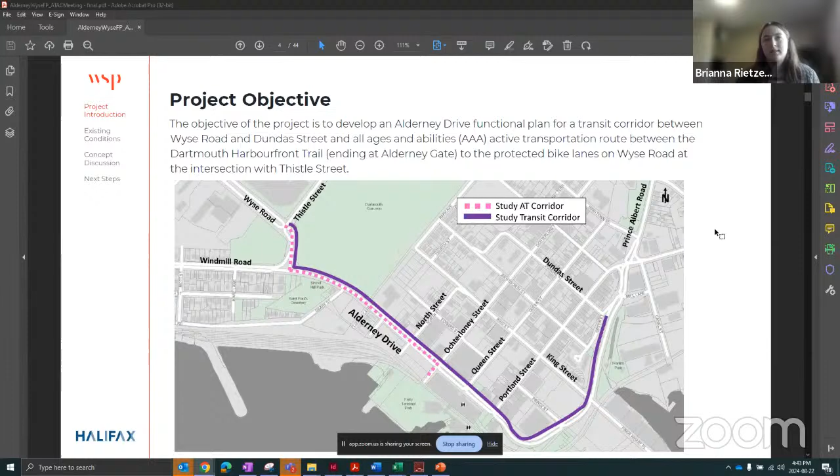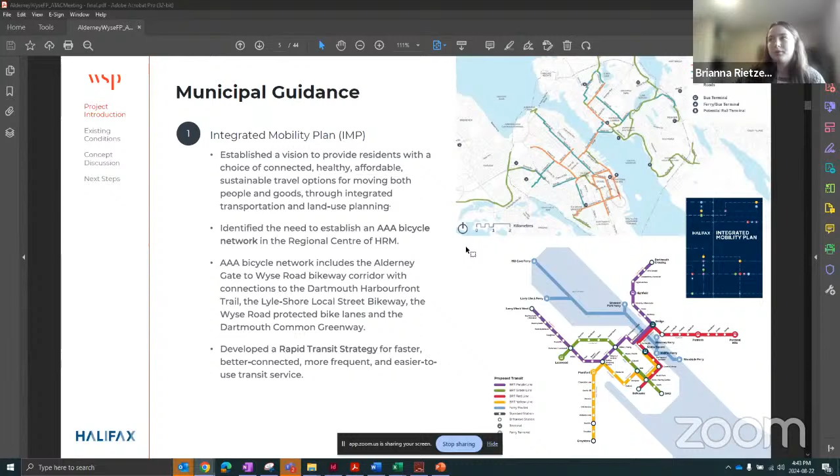We looked at the Integrated Mobility Plan, which identifies a cycling route and a bus rapid transit route through the corridor, and that's what informed this project. We also looked at the Active Transportation Priorities Plan, which made it a priority to double the number of trips made on foot and by bike by 2026. Hopefully this project can help facilitate that.

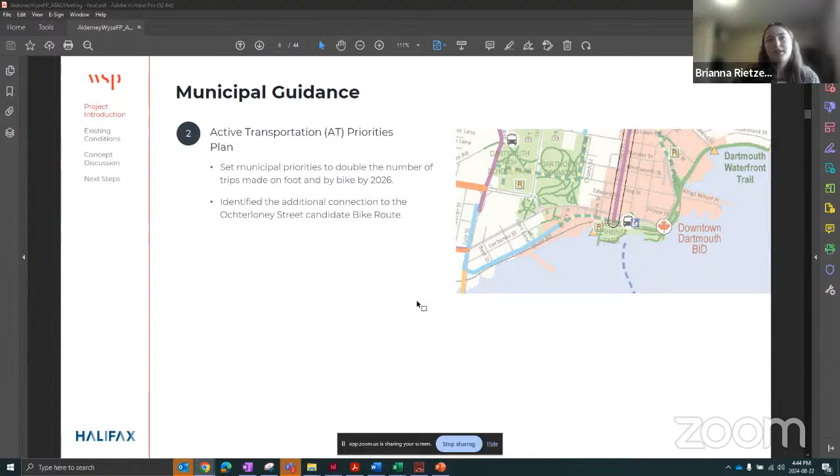So far in the project, we've established the existing conditions and come up with three conceptual designs for the study corridor, and we're in the process of public and stakeholder engagement. Then we'll evaluate the concepts and select a preferred one to take to functional design and report.

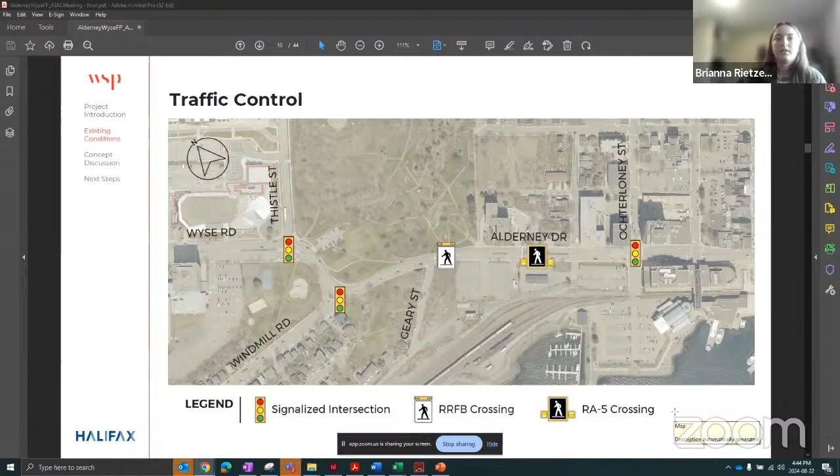So I've already gone through that. The existing traffic control in the area is a mix of signalized intersections, RRFB crossings, and RA5 crossings. The grade is pretty flat along the waterfront Alderney Drive area, but as it goes up the hill it gets pretty high, up to 8% grade in some sections.

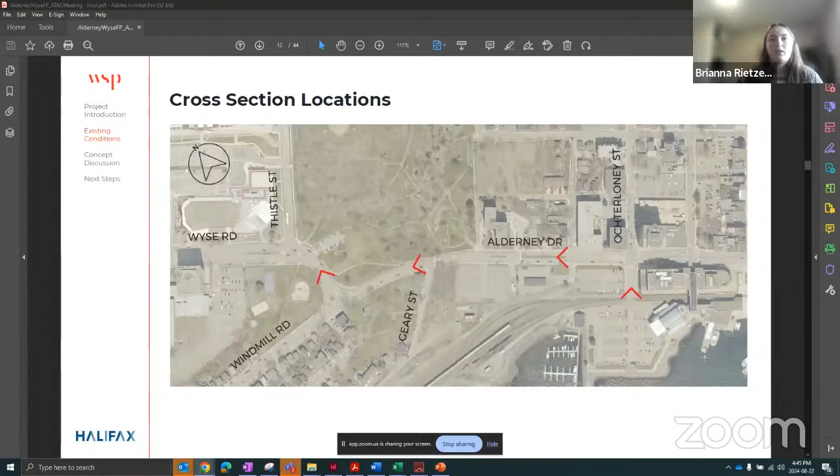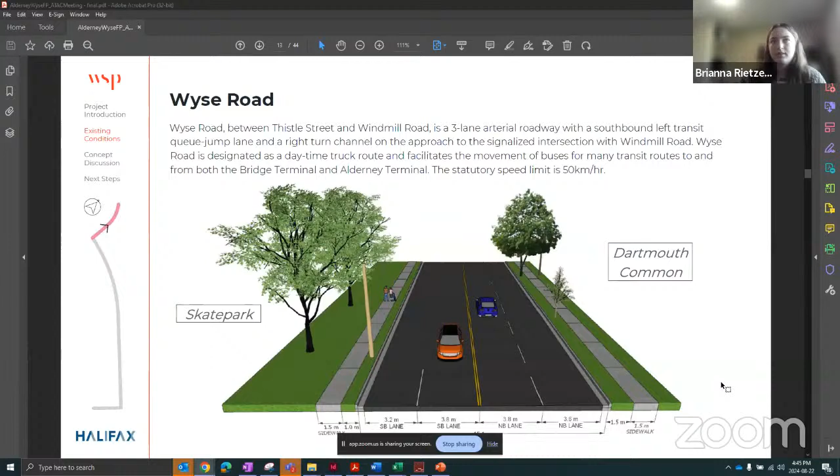The Wyse Road area is kind of a constrained area - there's a retaining wall on the right side and plenty of mature trees that we were hoping to avoid with this project. Same situation with Windmill Road, with a retaining wall on the Dartmouth Common side. This is our pinch point area - it was the thinnest road area, with plenty of mature trees in this section as well.

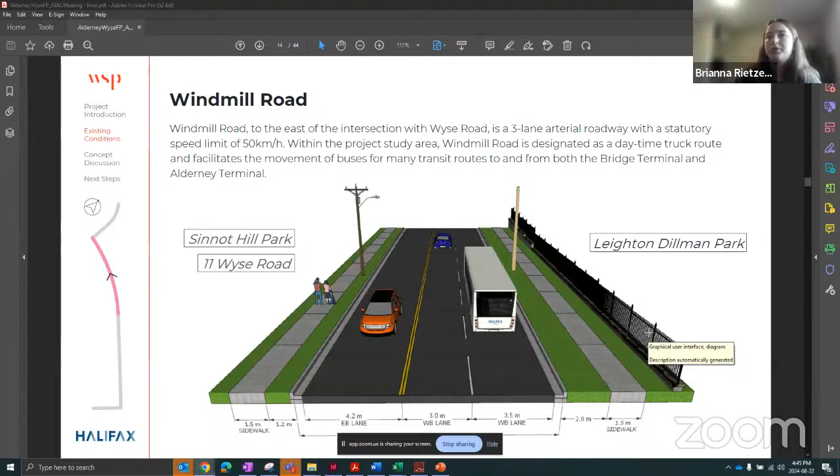Alderney Drive has mature trees as well, and some buildings pretty close to the frontage of the sidewalk, so that was something to consider. Ochterlony Street has a pretty wide cross section, but there's a CN rail crossing to think about, and a high volume of pedestrians through the area.

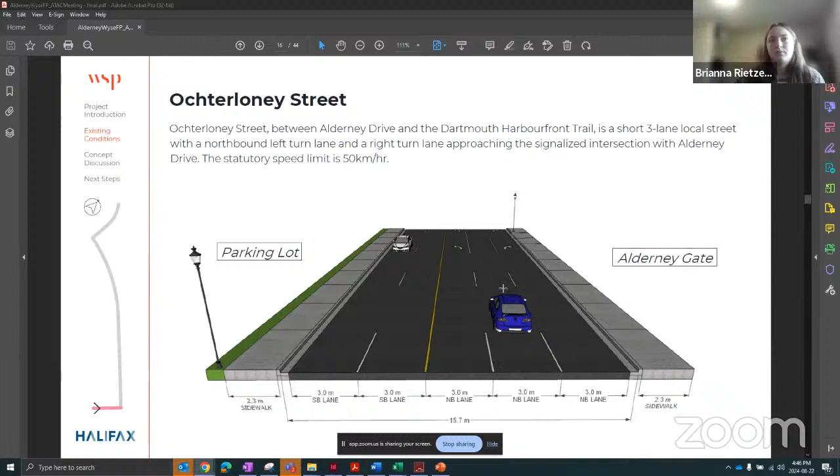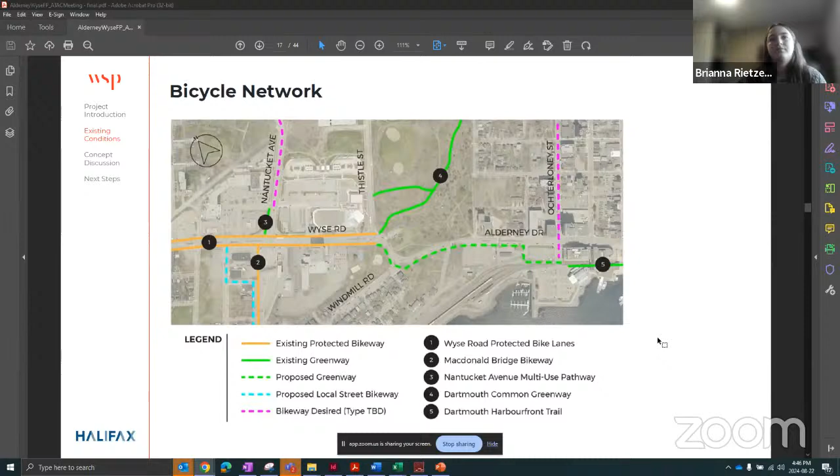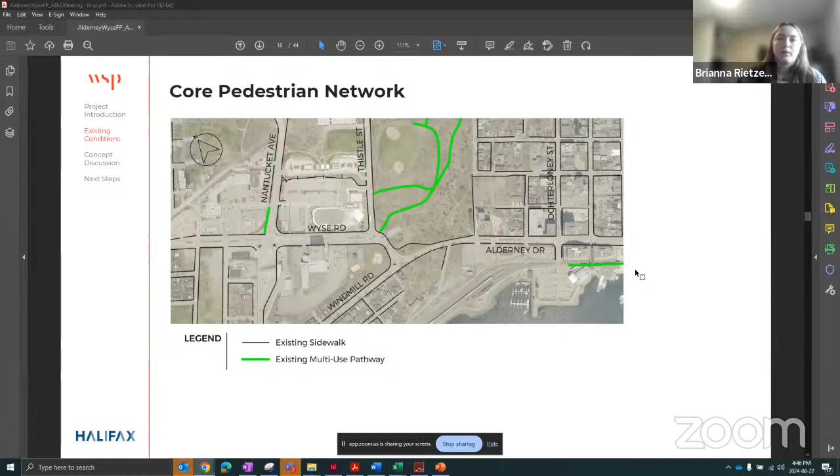Here's the existing and proposed cycling network. The dashed green proposed greenway section is what we're looking at for this project. In the core pedestrian network, the black is sidewalk, plenty of that available in the area, and the green is multi-use pathway. This multi-use pathway on the right side of the page is where we're trying to connect this project to the Dartmouth Harbourfront Trail.

We won't get into the volumes too much, but we did have volumes at these 8 intersections from September 2024, which we used to inform our concept options.

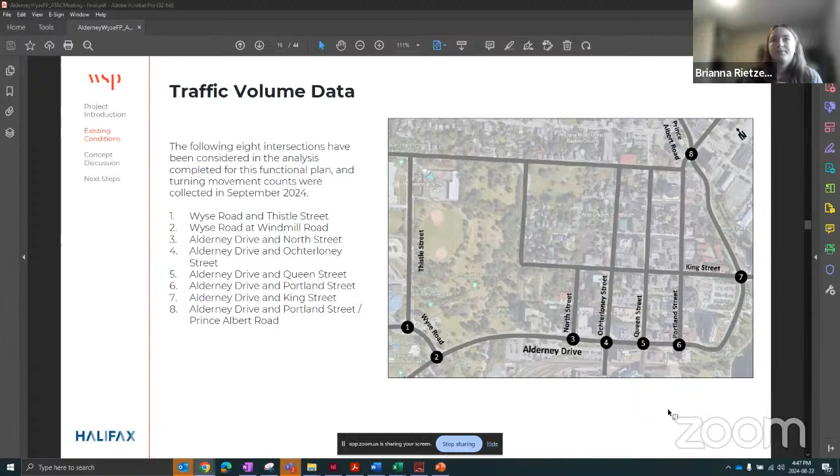Now I'll get into the concepts. We have 3 concepts for the active transportation portion of the project: Concept A through C, with A being more of like quick wins, C being more long-term, and B in between.

We'll start with concept A, which is unidirectional cycle lanes along Alderney Drive. A lot to take in on the pictures, but the yellow is multi-use pathway, the light green is unidirectional cycle lanes, the dark green is boulevard, and the cyan color is concrete bollards. The red indicates transit lanes, and the pink is where a retaining wall would need to be added or moved.

For the Wyse Road approach in this option, the configuration would stay pretty much the same as today, but we would have a shared lane for cyclists and transit. Right now it's just a transit lane, where the cyclists would then continue into their dedicated facility on Alderney Drive, which would be on the road but behind the bollards on the water side. On the non-water side, it would be behind the curb with boulevard.

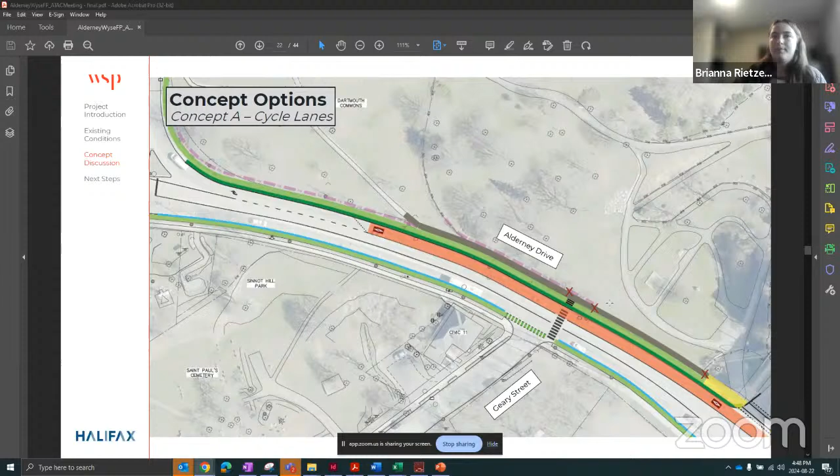Continuing down the hill, the facilities stay the same for active transportation, but we add a dedicated transit lane coming up the hill, not coming down the hill, because we were a bit constrained for space.

Continuing along, there's a short section of multi-use pathway before we cross the cyclists to both be on the water side around Church Street. That's what the purple color indicates, bi-directional cycle lanes. Those continue up to Ochterloney Street, where there's a multi-use pathway connection to the Harbourfront Trail multi-use pathway.

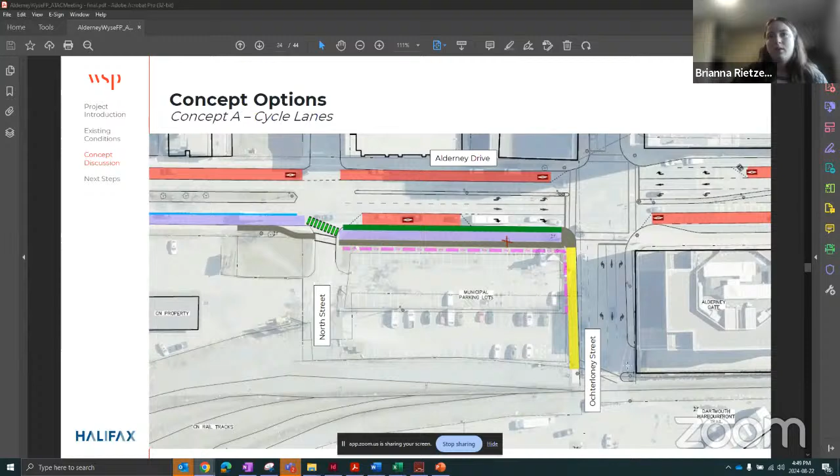The Ochterloney Alderney intersection is also where we start the transit lane on the water side that continues east of the intersection for our other concepts. So that's concept A.

Concept B focuses more on transit than active transportation. So we have dedicated transit lanes on both sides, but we have a multi-use pathway on the water side for active transportation.

The orange area you see here is kind of reallocated space. There's a channelized right turn movement now. We're proposing to remove that and have just a right turn lane.

We're proposing to extend the dedicated transit lane on the approach of the intersection to be able to fit more buses. And the active transportation facilities on the skate park side kind of do their best to skirt around any mature trees through that area.

There will be cycling crossings through the intersection to go to a multi-use pathway on the water side of Alderney Drive.

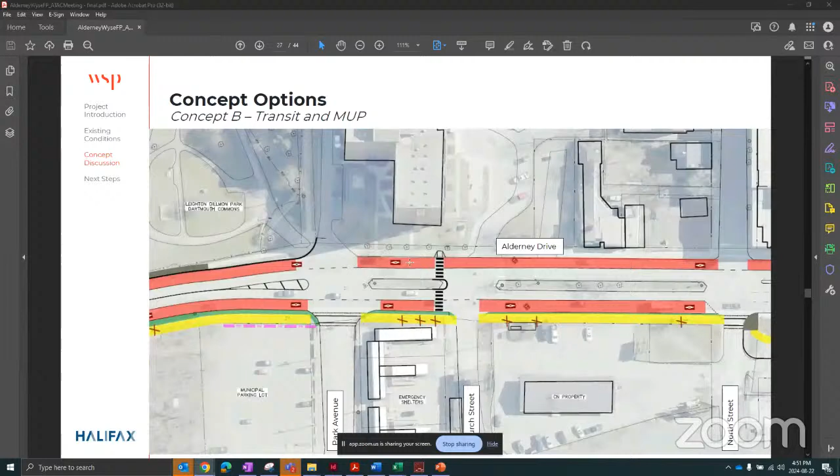Continuing down Alderney Drive, that stays the same: cycle multi-use pathway on the water side and dedicated transit lanes on both sides of the road. We keep the sidewalk option available on the non-water side of Alderney Drive, and that continues all the way through to Ochterloney Street.

For this option, we have the multi-use pathway kind of descend through the parking lot to avoid some conflicts at the Ochterloney-Alderney Drive intersection.

That brings us to concept C, which focuses on transit and active transportation. For this option, we have transit lanes in both directions and dedicated unidirectional cycle lanes on both sides, both behind the curb.

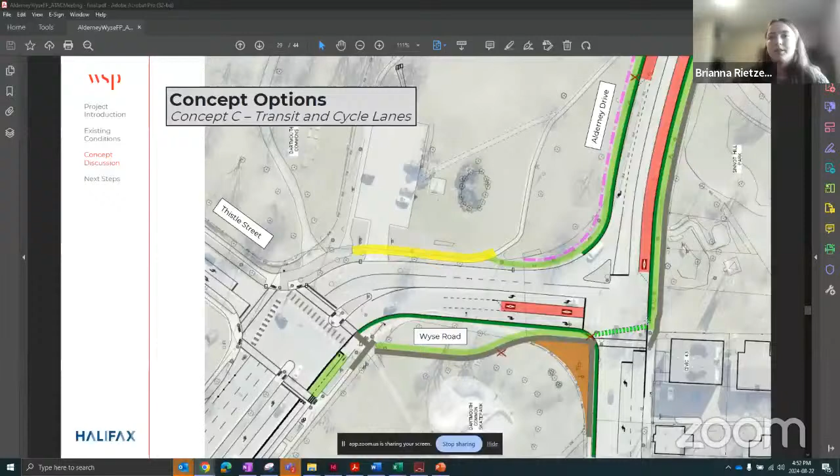The Wyse Road approach is similar to what is shown in option B, but the cyclists would cross into their own dedicated facility on Alderney Drive.

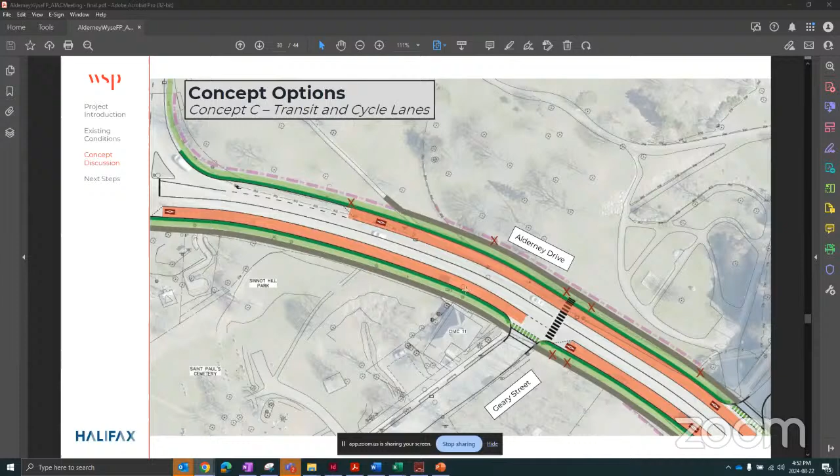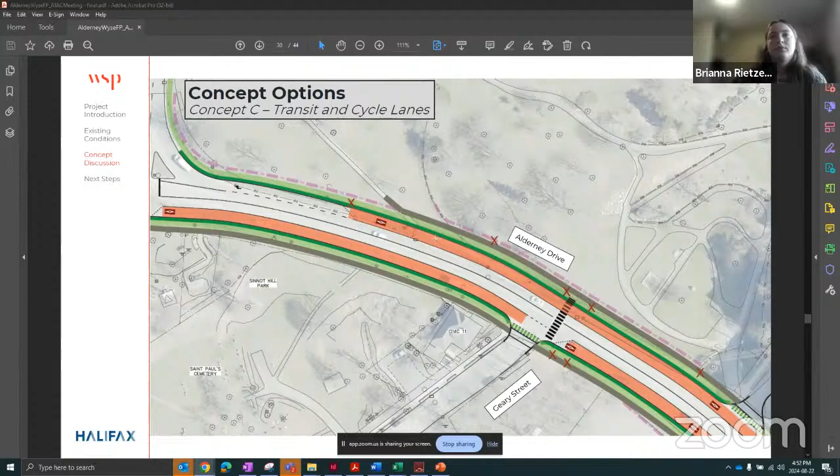Continuing down the hill, the same thing: we've got dedicated transit lanes on both sides, behind the curb boulevard, unidirectional cycle lane and sidewalk, which continues to Church Street.

Like in concept A, we have them cross there and into a bidirectional facility on the water side, continuing to Ochterloney Street.

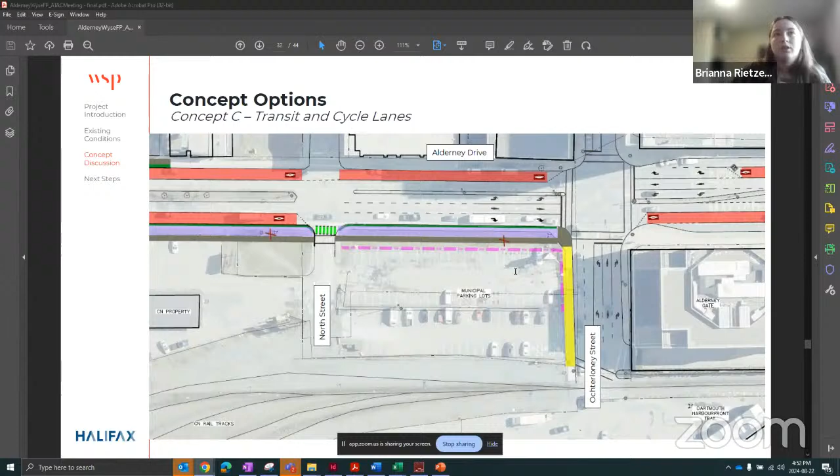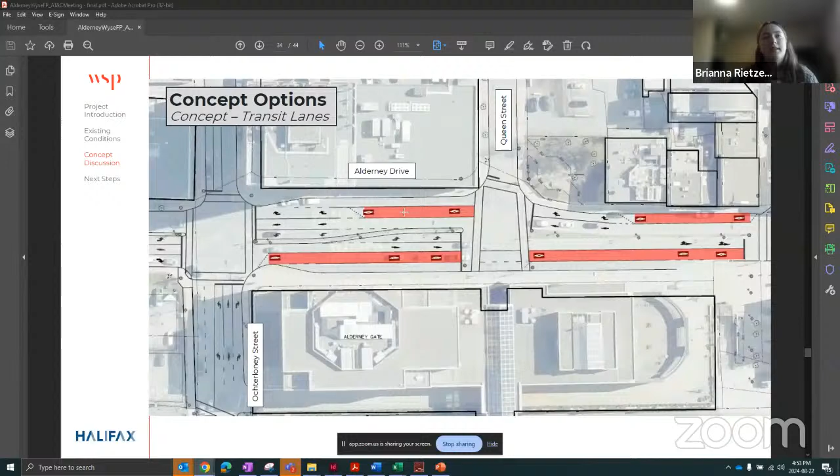Past Ochterloney to Dundas Street, we were looking at options for transit. So we saw what if we repurposed the existing lanes to have dedicated transit lanes. Here's what that looks like: we keep the existing turning movements, but add in transit lanes.

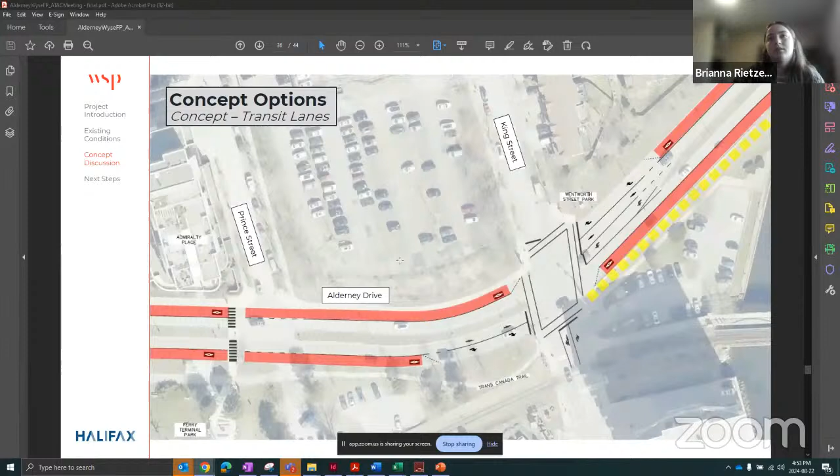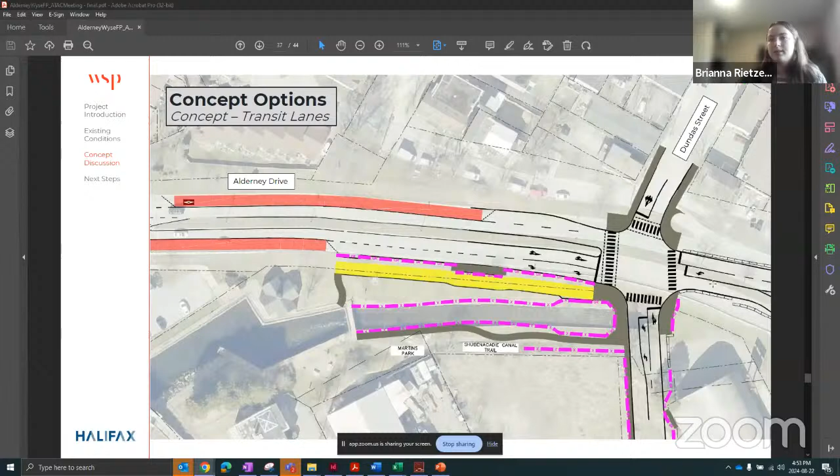Continuing along past King Street and up to Dundas Street, this is preliminary line work for a different project, the Sawmill River project, which is happening later this year I think. It's not our project, but that's where the extents of our project were.

So then we were into some public engagement. We had open house sessions about a month ago, with approximately 40 attendees from the neighborhood. We also had a pop-up engagement session at Alderney Landing to catch people coming off the ferry to see what they had to say.

Some preliminary comments from those sessions: keep cyclists and pedestrians separate. People were less interested in the idea of a multi-use pathway. Build for the future. Consider congestion during events, since there are often events at Alderney Landing which may change traffic patterns. Prioritize transit to move the most people. And we heard that option C was the most preferred option from those open house events.

We also have the survey going on and the stakeholder site walkthrough that Maria already mentioned, next week.

Some preliminary feedback from the survey: get rid of parking along Alderney Drive. There's a short section of parking which people seem to not like. There's concern about the impact on the Dartmouth Common and the mature trees in the area. Not really a part of this project, but people wanted to keep Lyle and Shore as an option for cyclists.